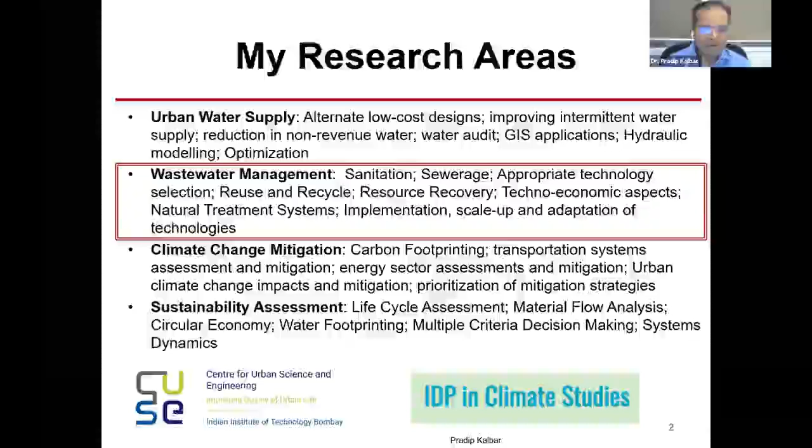Today I'm going to focus more on the wastewater story, which is the theme of this webinar. Specifically, the urban water cycle in India - we have to reach a circular urban water cycle. But currently we abstract water, treat it, distribute it, consume it, generate wastewater, try to treat it, and then dispose of it. There is no circularity - we are mostly in linear use of it.

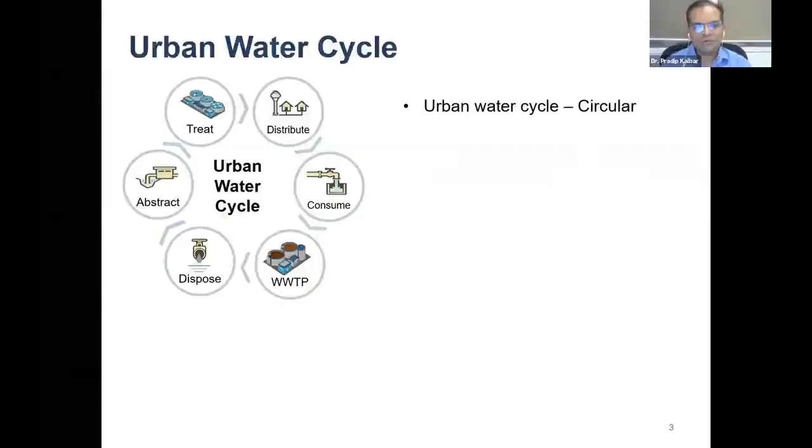So this is our water cycle, but a lot of urbanization impacts are happening - population, as Professor Tansel highlighted, industrial uses are increasing, lifestyles are changing. So many issues are there, and changing from linear to circular is a big challenge. We will see what the challenges and opportunities are.

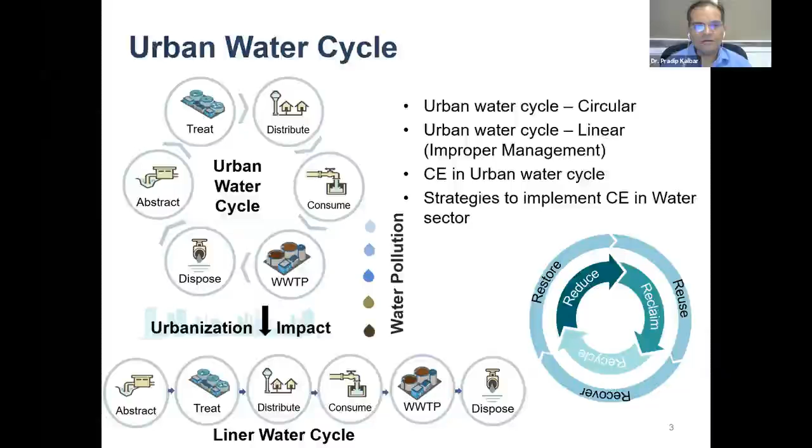So we want to achieve these particular 6 R's. The entire presentation will be attached to this reduce, reclaim, recycle, restore, recover - these principles of recycling. And there can be more R's also - people have listed many types of R.

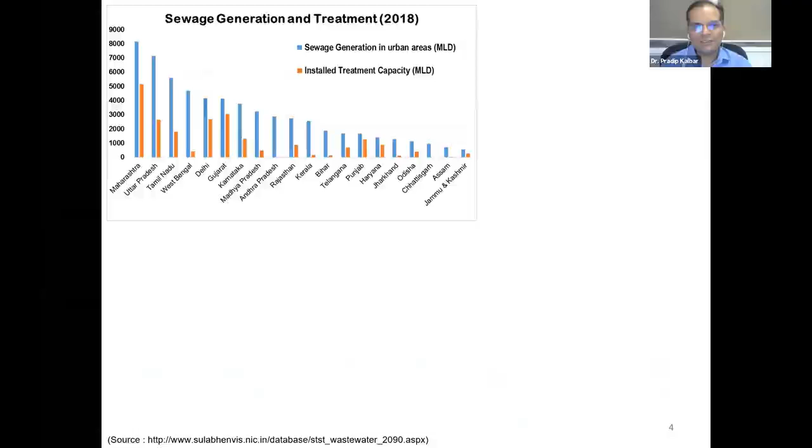Particularly in India, looking at the sewage treatment and generation scenario, every state is falling short - there is a gap between how much sewage is generated and the installed capacity. Every city is behind in installing more treatment capacity. Overall in India, about 37% sewage treatment capacity exists, and the rest is the gap.

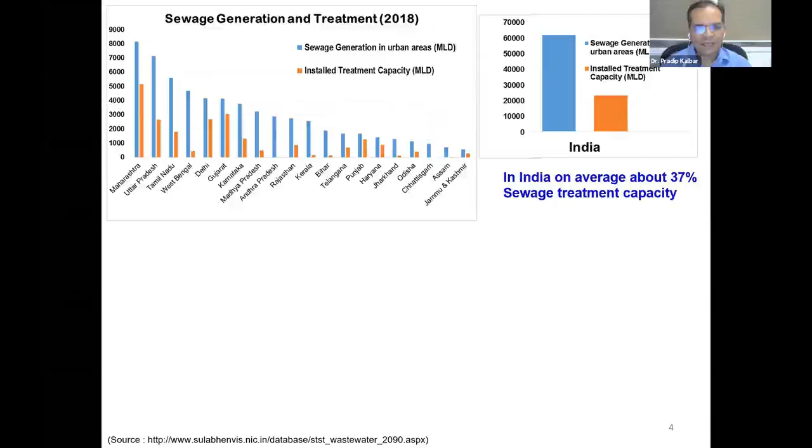But we have to understand that generated wastewater itself is a more important resource, and that particular change of mindset is needed.

Recently this data was released again from the Central Pollution Control Board. If you see, although we say we are in a gap of the treatment system, the capacity that is installed is not fully utilized. In many locations I have found that the treatment plant is there, but the collection system is not complete or not there at all. So we are in this situation where a treatment plant of big capacity for the next 30 years is installed.

But I think as a consultant or as an engineer, we understand there can be modular construction, there can be phase-wise construction, but urban local bodies want to go for a single tender for a 30-year contract. So there are many issues, and the entire investment in huge infrastructure is going to waste. Capacity utilization has to be focused on, even with simple analysis. So a couple of students are going to work on further detailing this particular capacity utilization - but I see this as a big gap.

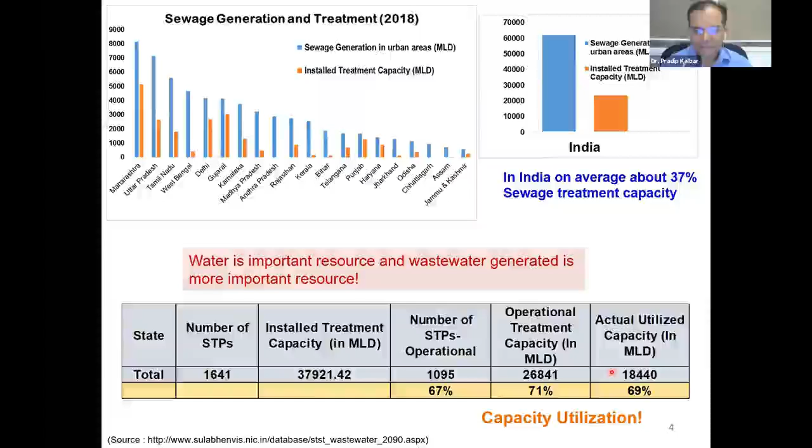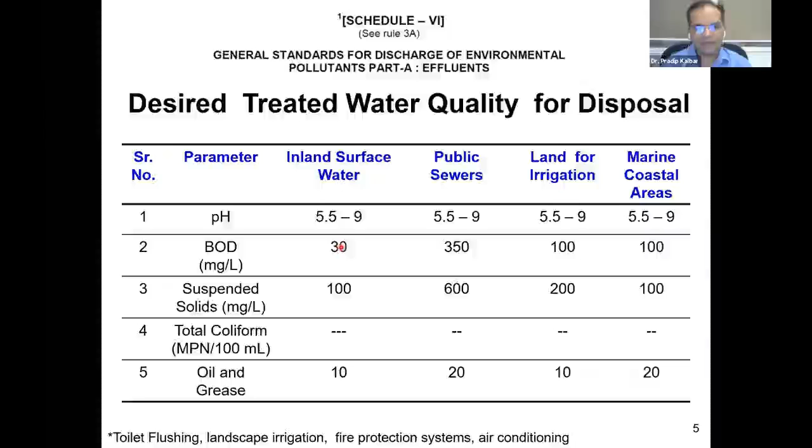Coming to quality standards - historically we have used this general discharge standard, where our typical BOD mindset is 30, and there has been a lot of pressure to change and modify more stringent norms. So recently there was a change - I'll come to that.

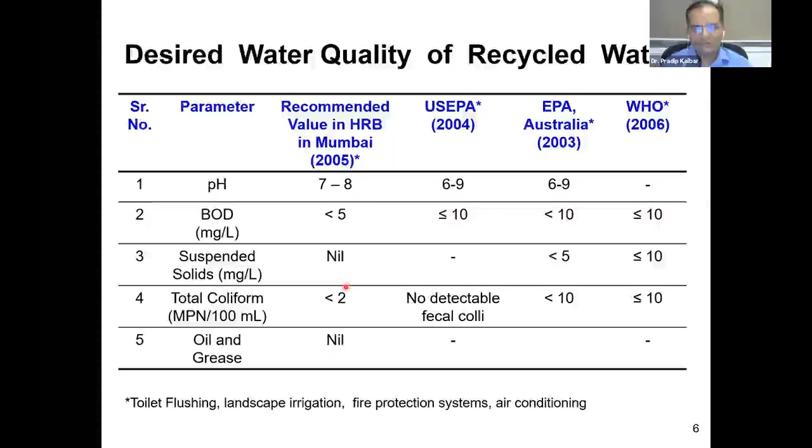So it is not a question of whether we have a standard or whether we need more debate on this. We have a standard, and that has recently been given a clear order from National Green Tribunal that if your typical inlet is sewage, the committee recommended these standards basically for mega and metropolitan cities: 10 milligram per liter BOD standard, class 1, with some flexibility. But NGT has clearly said that all water resources are equal, and we have to aim for this particular discharge standard.

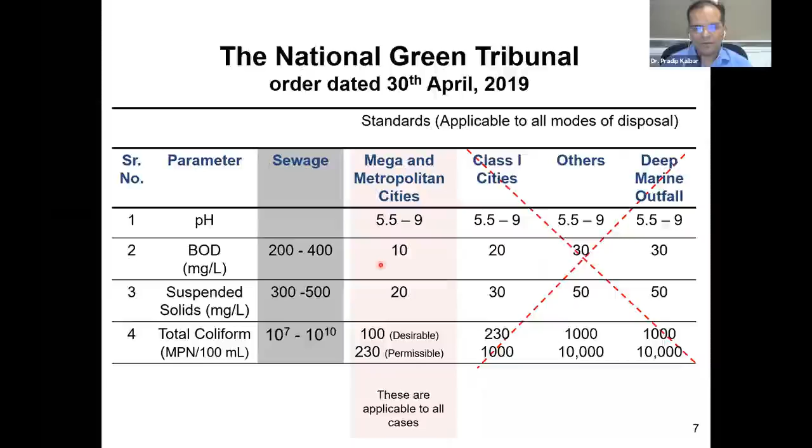Now this poses a big burden on the infrastructure, because how will cities generate the money to cope up with this new discharge standard, when they are already struggling to match a 30 milligram per liter sewage treatment infrastructure. Now suddenly 10 milligram per liter is a big challenge, but it can be converted into an opportunity, and that's what I'm going to discuss.

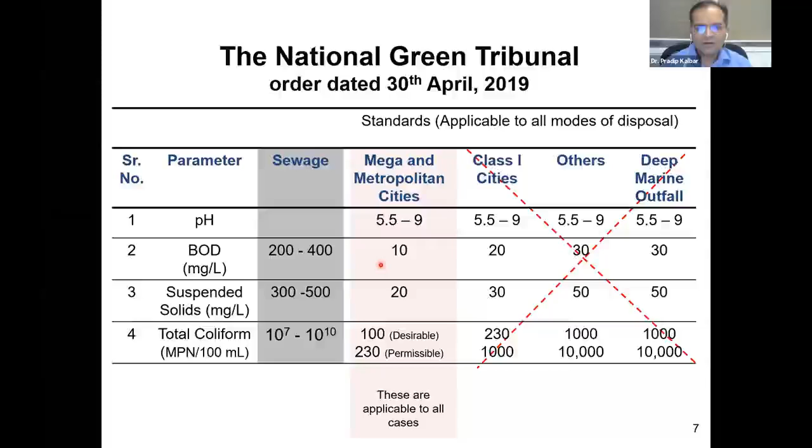These are the broad approaches of wastewater management, and Professor Tansel has already given you the overview. But on the management side, we first have to work on prevention and conservation also. That gets neglected always, and we directly jump to the treatment side. But this is a big box, with big opportunities there.

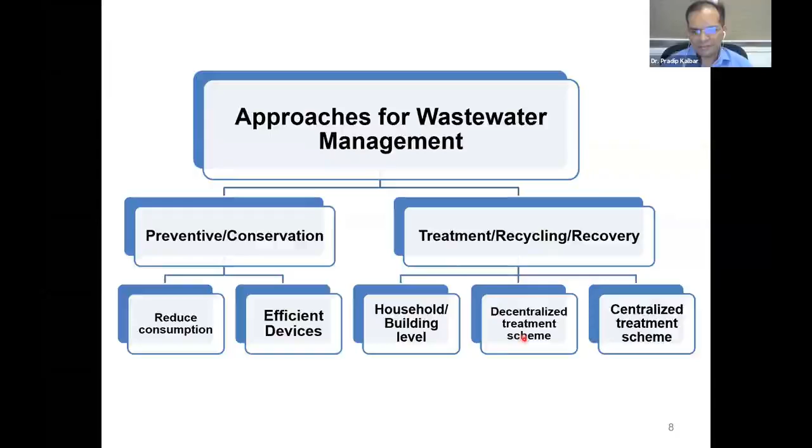We have to move from treatment to recycling to recovery, and it's a big change in the infrastructure mindset and infrastructure planners that has to be brought in. It's not only the treatment, but we have to lead to recovery. Then there is building level treatment, decentralized, and centralized. So this spectrum also we have to keep in mind.

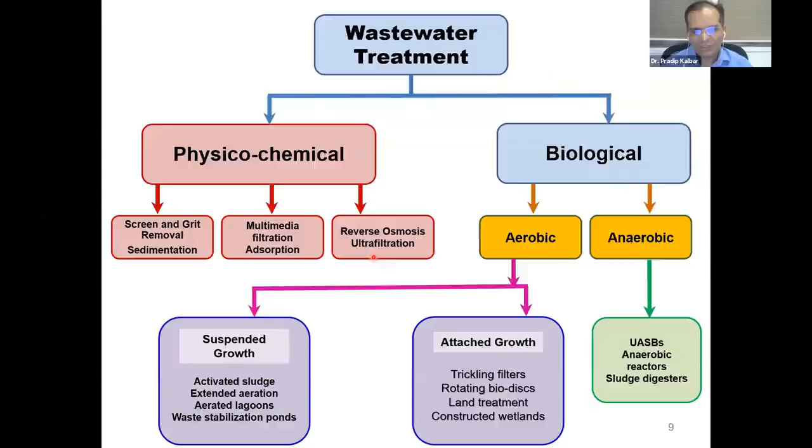And there are different technologies, from physicochemical to biological, aerobic to anaerobic, suspended growth and attached growth. I think people in the water industry know this particular diagram. So we have the technology, we have the need. So what's wrong? Why are we not able to achieve this? That is the bigger question. So what is wrong with the current approach?

If you see, this is, let's say, the physical boundary of the city. What we are doing is we have agriculture land using artificial fertilizers to produce our food. That food gets consumed in the households. We use detergents and chemicals in the households. We fetch fresh water from a large dam, stored hundreds of kilometers away, for example in Mumbai city. And then we generate wastewater, which again has NPK and organic matter as pollutants. Then we have a centralized treatment system, which discharges this sludge and the effluent.

And these all carry these particular nutrients and energy. So the issue is that on one side, we are fixing nitrogen at a huge amount of energy in the fertilizer industry, and we are again putting energy back to release this nitrogen back to the atmosphere. So you can see, on one side, you have a huge investment of energy for fixation and then release. So this needs to be fixed.

We have to stop this particular use of artificial fertilizers and create fertilizers from this sludge. That is a huge technological change, and a lot of policy changes need to be done. We have to stop consuming fresh water as much as possible, and create secondary uses of the water that we are already fetching. So virgin water consumption has to be reduced, and we have to stop consuming the energy.

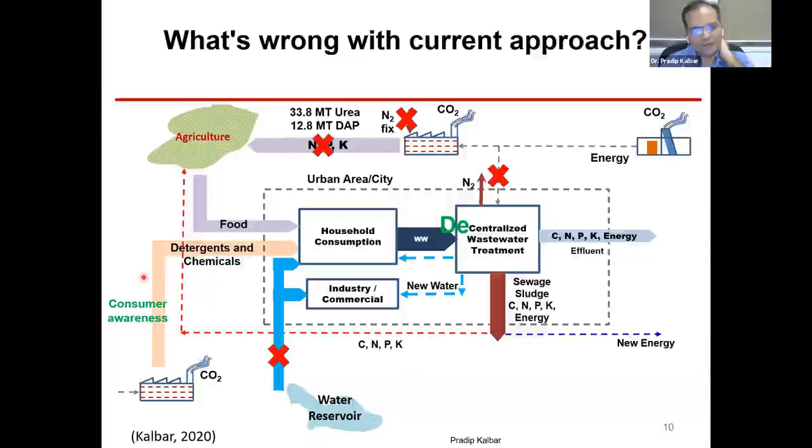And when I say decentralization, many people get upset. People say, oh, why decentralization? Do you know what is the problem? I know, I worked in industry. I know what the problems and issues with the technologies are. So the issues here are - we will discuss decentralized and centralized later - but consumer awareness is another big challenge.

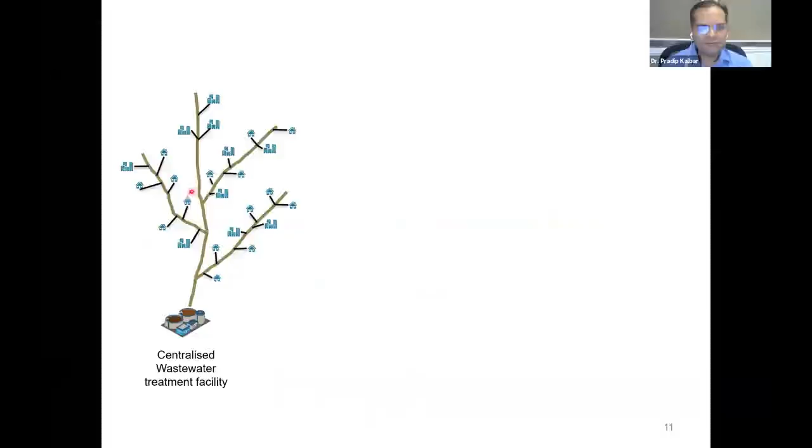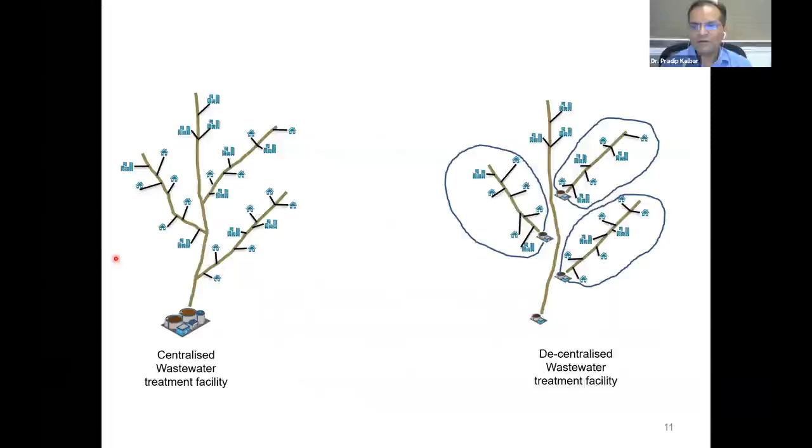So basically, centralized system, as we all know, is a tail-end system where everything is taken out of the city boundary, or towards the end of the city, and then treated. In decentralized, we try to do some scalable, small scale systems where decentralized treatment can be used.

Now, the issue is this decentralization is of the scale. Too small systems are difficult to operate and govern, and do not offer scale of economy. So we should not jump on decentralization just blindly. We also need to look at what is the scale of economy, how small systems are feasible.

Highly centralized systems place a challenge in recycling of treated effluent and sludge, because if you put everything at one place and try to recycle, again secondary distribution network cost will come, sludge transportation cost will come, and there is no scale of economy beyond one point. So all engineers will understand that the scale of economy is somewhere in between.

This additionally requires deeper sewage network for flat terrains and is difficult to maintain. I've seen in many cities the situation of sewerage networks. Enthusiastically, people go for a sewerage network underground, and then maintenance is with the urban local body. It is very difficult for them to manage. So we have a spectrum from highly centralized to highly decentralized.

Currently urban local bodies, and I would say consultants, are also very comfortable with this particular idea of highly centralized infrastructure. They are basically trained to think in that manner only. And I request all of you to take note, because it is easy to prepare a DPR in one shot for a centralized system, propose everything in one go, and just go for a big budget project. Everyone likes that - politicians, consultants, EPC contractors, everyone likes that. And that I see as a very big problem we have, and a lot of changes are needed.

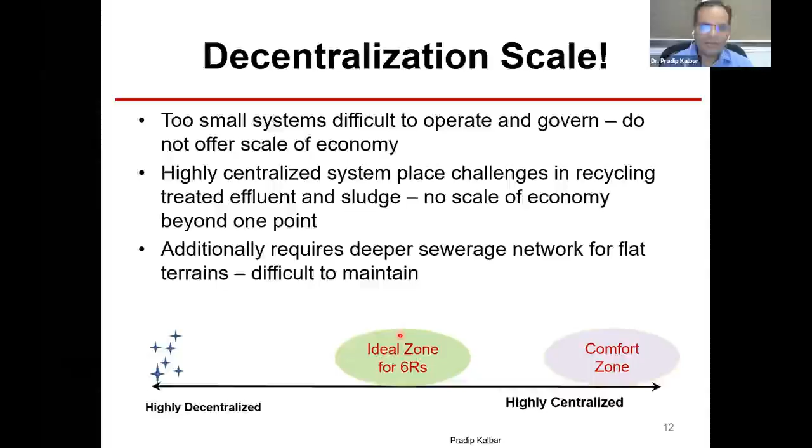The ideal zone for implementation is in between, where for every city this scale will be different. So we have to identify for that given city how we can segregate the centralized system and have a decentralized system, so that the 6R - recycle, reuse, reduce - all those will be implemented. If we have that kind of flexible infrastructure, it will create much more opportunities than a centralized infrastructure. That's the whole point I'm trying to make.

So the challenges in wastewater recycling: scale of implementation is not known. People just go for centralized because there is no knowledge. So we are working on that to create that knowledge.

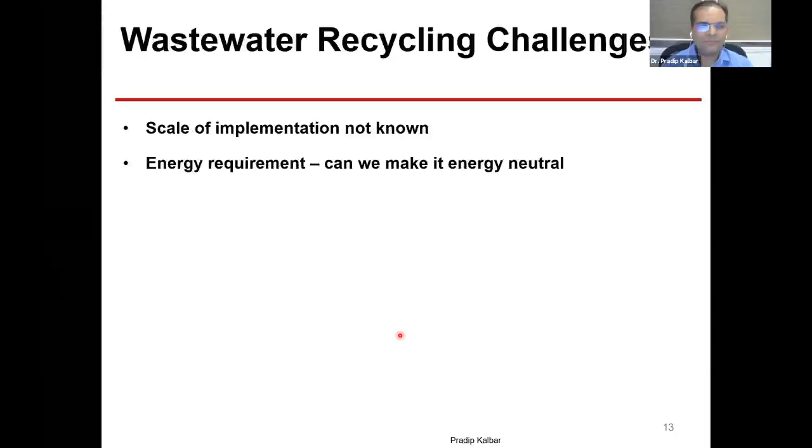Energy requirement - can we make it energy neutral? Because there is no revenue with the urban local body to operate these plants. So much of a dark situation - people put off the aerators because they cannot pay energy charges. So this entire infrastructure will go to waste.

There are resources to be extracted - nitrogen, phosphorus - lot of technology scale up is needed.

Pathogens and pathogen removal - if you want to recycle water for higher ends, there's a question of reliability, because we have to develop a system which is reliable. If there are risks posed by the treated wastewater - whenever somebody asks me why I say costs are higher, it's because I'm imagining a very reliable system. If you say you'll provide recycled water to industry, you have to provide it. You cannot say tomorrow, 'okay, today my plant is not running,' or 'today this particular parameter is not working.' So that reliability cost also needs to be incorporated in the system. That's why the cost of recycling water has to be properly counted.

Emerging contaminants - we are already not able to match the carbon, BOD, nitrogen, phosphorus limits, and there's already so much use of household chemicals. That's why I said consumer awareness matters. So many chemicals are used unnecessarily in households and get discharged, and that is posing another challenge to the recycling of water. Revenue models - who will fund this capital infrastructure and operation maintenance? That is a big question.

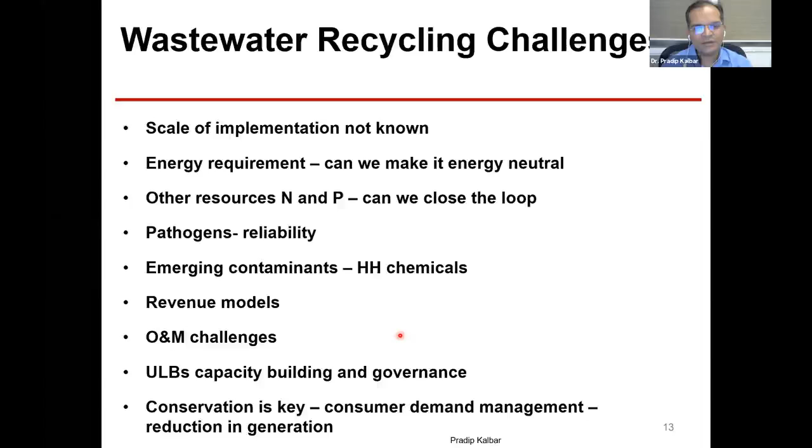Operation and maintenance, capacity with the urban local body, skilled manpower, governance, and conservation all need to be thought of together to really imagine this particular system. I have documented this entire story in a paper. You can read it here, or write to me and I will send a copy.

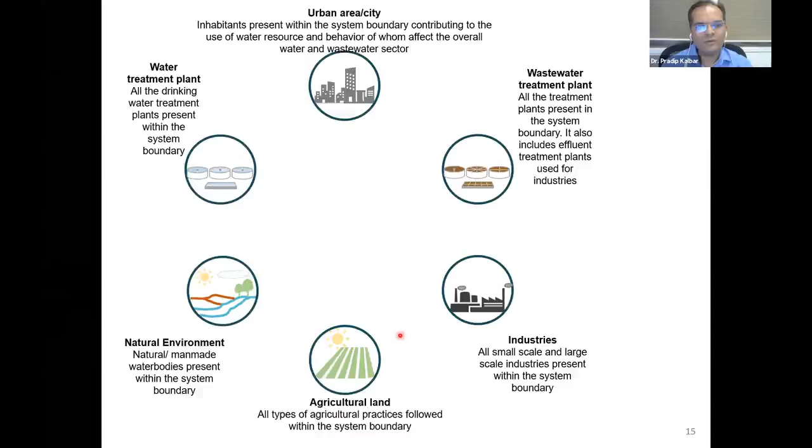We have this urban water cycle where a water treatment plant, urban area, and wastewater treatment plant exist. Currently we are doing it in a linear way, disposing of the water and the nutrient. We have to implement these 6 R's to change this picture, instead of one city passing the problem on to another city. Fixing this is the entire effort we need to make.

First we have defined what recycle and reuse mean, since those definitions need to be clear. Reduce means at every phase we have to reduce water wastage and consumption. Reuse is cascading of resources, meaning how much water we can use without treatment. Recycle is when a city uses its own water for secondary purposes after treatment.

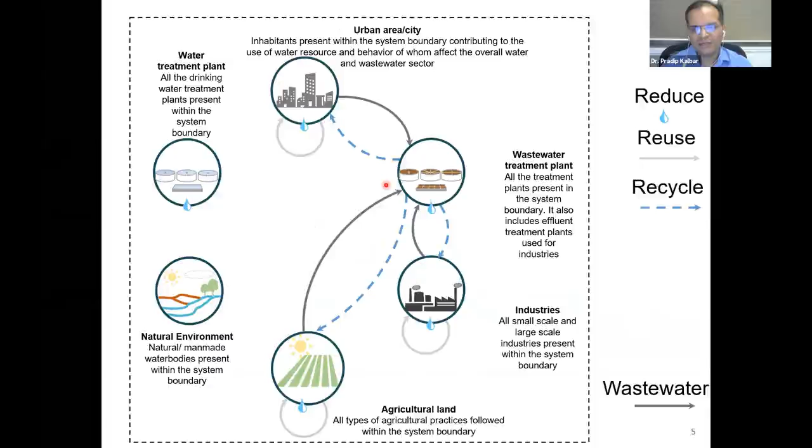Reclaim is when a city sells water to industry, or industry buys water from the city or other stakeholders. Restore is when there are no enough buyers - in many projects I've seen good treated water available but no buyers due to a policy gap, so you can recharge the groundwater instead. Recover means energy recovery and nutrient recovery, which is the next phase of technologies we need to adopt.

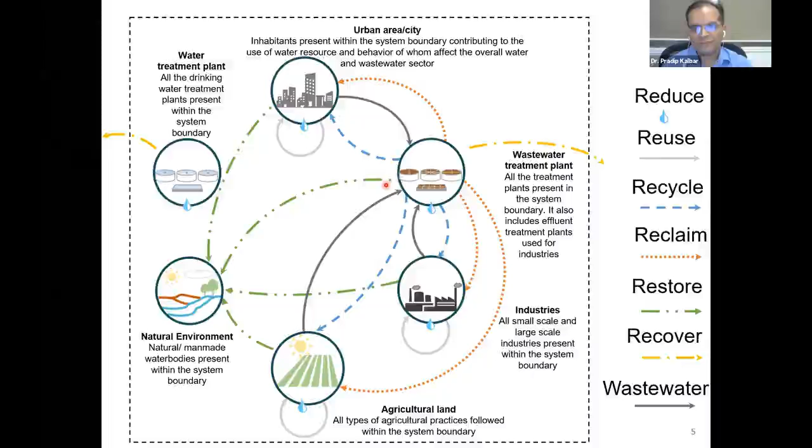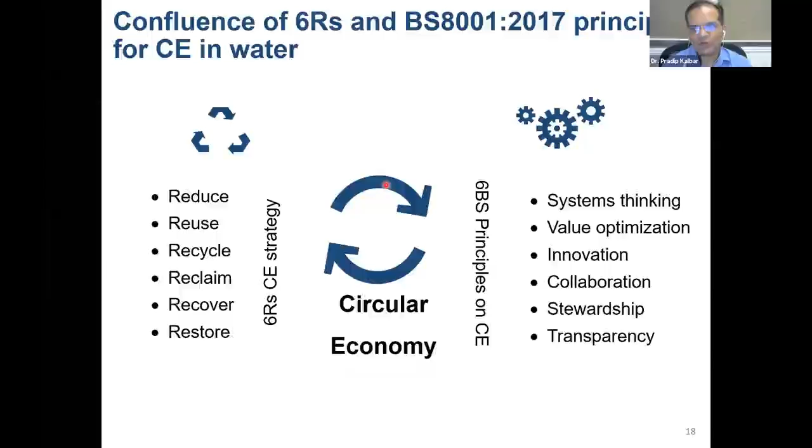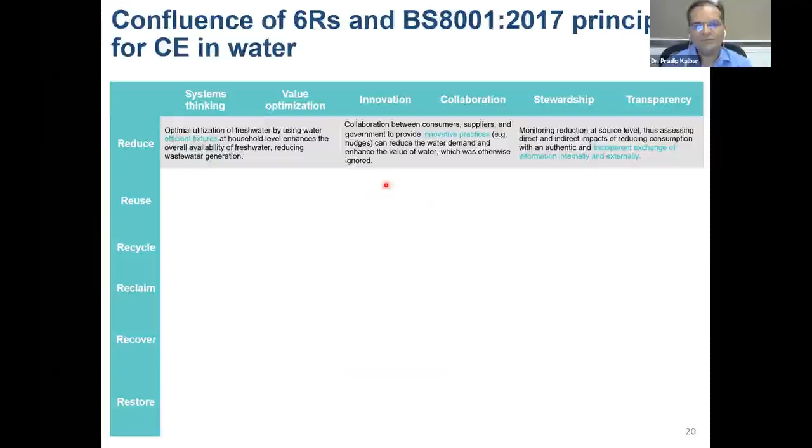Circular economy provides a nice framework for bureaucrats and managers, because here you apply system thinking, value optimization, innovation, collaboration, stewardship, and transparency. We have identified how urban local bodies can work with industry and mapped each of their R's with these principles of circular economy.

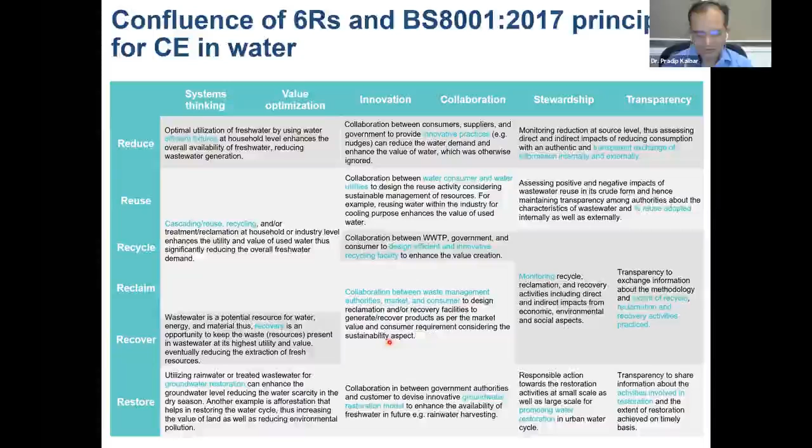You can go through this detail, it's very thoughtful. My PhD students and I have worked on and given this tabular formulation, showing how we can apply system thinking, value optimization, innovation, collaboration, stewardship, and transparency. That is the framework we have proposed.

The entire point I'm trying to make is that cities first need to create a market for recycled water, because if there is no market, there is no point putting in so much infrastructure. There will only be regulation, but if by meeting a regulation you can also sell the water, the sustenance of the system will improve. For example, let us discuss Mumbai's case.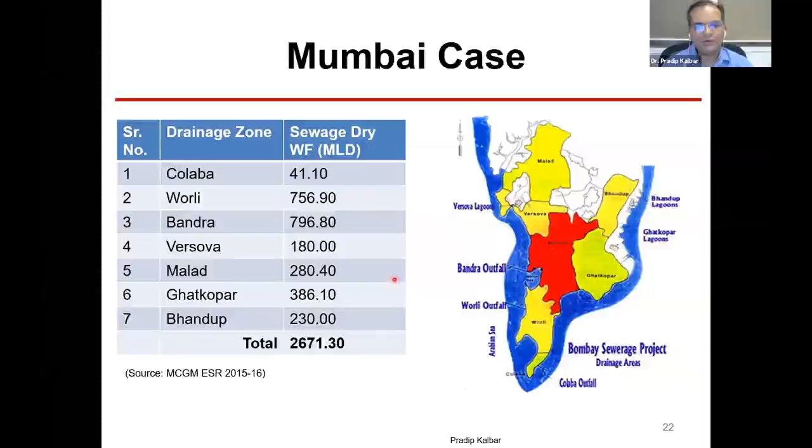Mumbai, as you know, is a coastal, island city, with locations 1 through 6 - there are 7 locations which are the draining points of the city, and this sewage flow is given here. The city's current plan is to go for sewage treatment and recycling because of an NGT order. To achieve high effluent water quality standards, the MCGM plans to spend around 20,000 crores on its 7 sewage treatment plants.

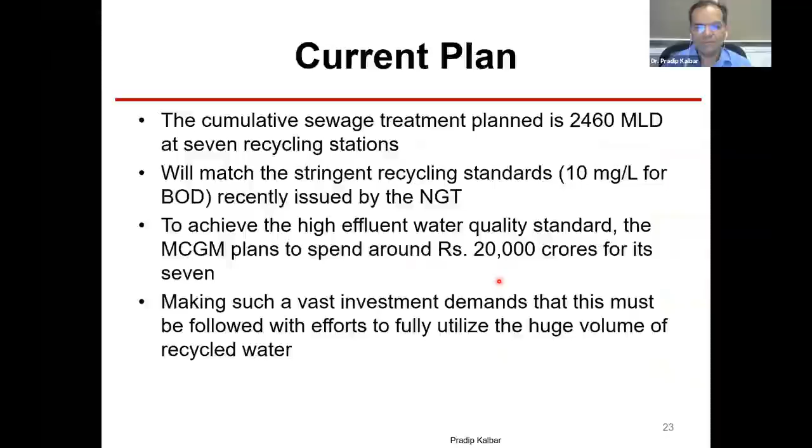If you make such an investment, it also demands efforts to utilize the huge volume of recycled water. So you can imagine, spending 20,000 crores just for treatment is not complete utilization. Why is recycling not possible in the current context? Because it is not known who will consume the treated sewage unless there is a market for it.

The cost of recycled water is around 10 to 12, not accounting for distribution cost - that's just the treatment cost I'm talking about. Whereas the freshwater tariff is about 3 to 6 per meter cube. So there is significant variation at a regional level.

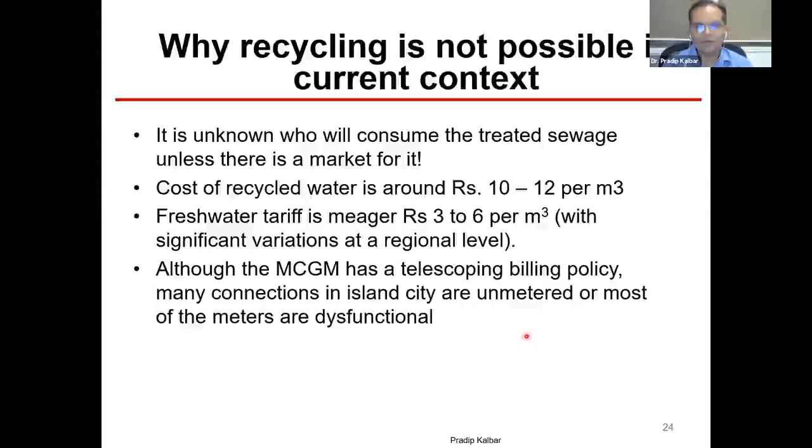Although the MCGM has a telescopic billing policy, the connections are not metered and most of the meters are dysfunctional, so the implementation of the telescopic billing policy remains on paper only. The production cost of water in Mumbai is about ₹15.

So it's the issue of price - at what price are we producing the fresh water? The revenue demand and collection from the MCGM has been the same for the entire last decade. Basically, there is no change in raising the bills.

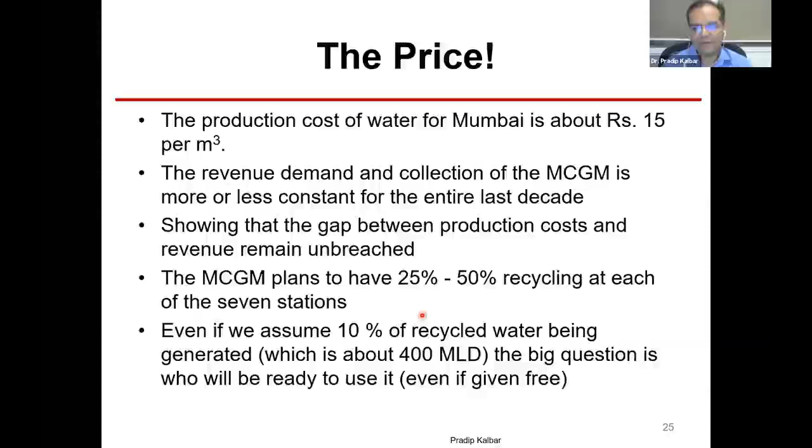That is the scenario currently. This shows that the gap between production cost and revenue remains unbreached. The MCGM, even in the DPRs, has written that the plan is to have 25 to 50% of recycling at each recycling station. Let's say even if we realistically plan for 10%, it is about 400 mld. The big question is who will be ready to use it, who will distribute it.

It's a big question. The next issue is location. The planned recycling stations are highly centralized at the fag end of the system in the near coastal areas. It will need a large secondary distribution network in mostly concretized roads already crammed with dozens of other utilities.

So instead, decentralized recycling stations of about 50 mld. This 50 mld is my number, you can debate about it, but for a city like Mumbai, 50 mld can also be called decentralized, and maybe more feasible in Mumbai's case, as this will create an opportunity for establishing a localized recycling network. This number has to be decided for each city. For 100 mld kind of sewage flow in a city like Kolhapur, the decentralized scale will be different.

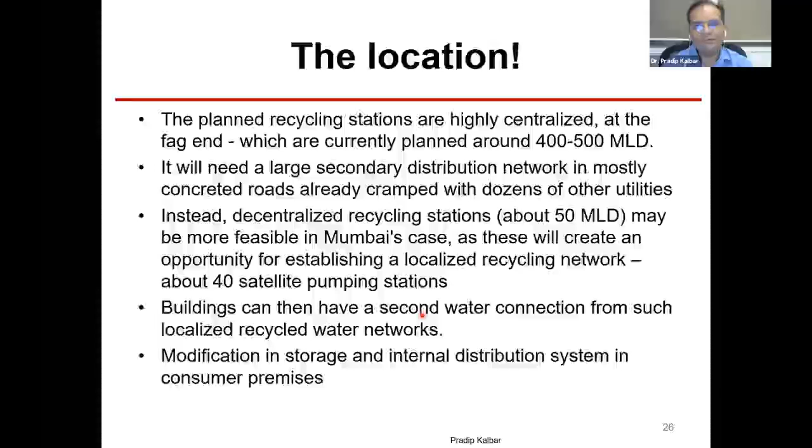So buildings can then have a second water connection from such localized recycling water, and modification in storage and internal distribution. There are a lot of changes needed in consumer infrastructure. The guidelines and bylaws, because the existing bylaws do not anticipate other water resources for non-potable use, need drastic change. So it's not the technology, it's not the physical infrastructure.

Bylaws need to change to enable mandatory dual plumbing systems for future buildings. I know it is difficult for existing buildings, but if we do not act now, it will be too late. Again in 10 years I'll be making the same presentation that there is a need for dual plumbing systems. There is no point.

So resizing of all the municipal connections, because current connection sizes are huge in Mumbai, at least we know. Residential, commercial, industrial connections should be restricted to potable water supply for domestic purpose only, because they are getting the benefit of fresh water.

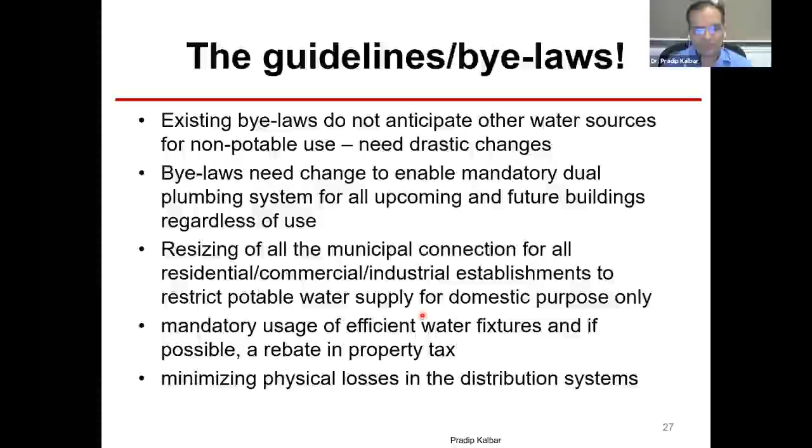If you change the connection sizes, or cut off connections, some stringent action has to be taken. And mandatory use of efficient water fixtures, and if possible an associated rebate, and minimum physical losses in the distribution system. That is another story, how we can improve water supply.

There is a need to provide comprehensive procedures and guidelines, responsibility of each stakeholder - who will sell, who will buy, at what cost, the level of treatment required, its use after treatment, expenditure - all this needs to be defined before we jump for very fancy high-end recycling stations.

In summary, there is no immediate need for toilet to tap. Many people go abroad, see that, and think okay, everything is connected, that is fine. In Western countries, we have the reliability, the guidelines, and everything is there. So enough other avenues are available in India for other secondary purposes.

We have to first create a practice of recycling water. Recycling at the point of use or sale, that is the key. If you recycle at some moon on Mars, who will distribute that water? So that is another challenge.

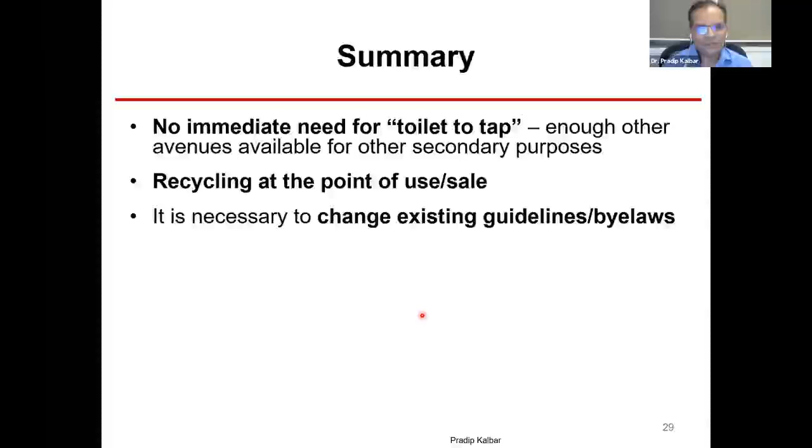So it is necessary to change existing guidelines and bylaws. Scale of implementation of the solution is more important than the solution itself. Many people spend time on technology discussions, but what is the scale you are implementing? That is more important.

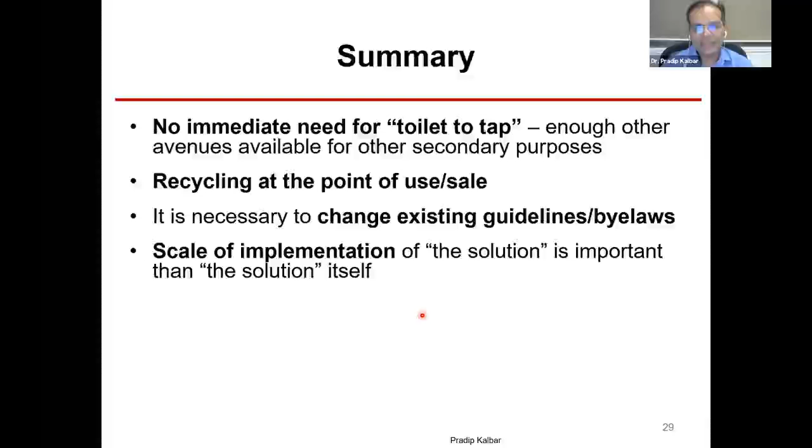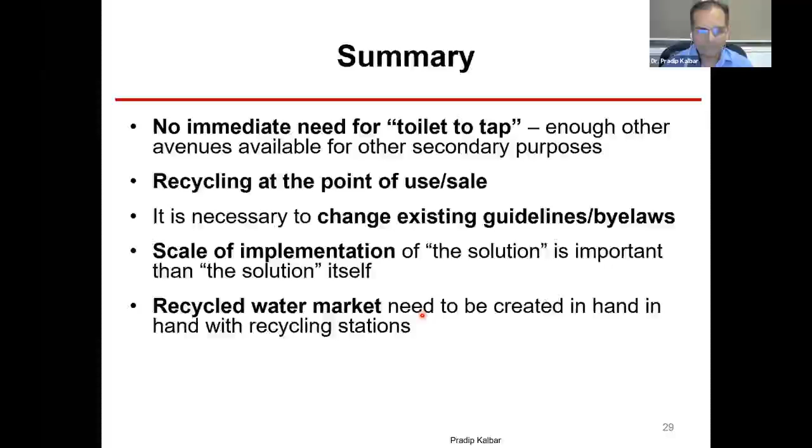A recycled water market needs to be created hand in hand with recycling stations, because unless you have a market, there is no financial sustainability for these recycling stations. Decentralization and closing the water, carbon, nitrogen, phosphorus and energy loops is the key to achieve sustainable wastewater management.

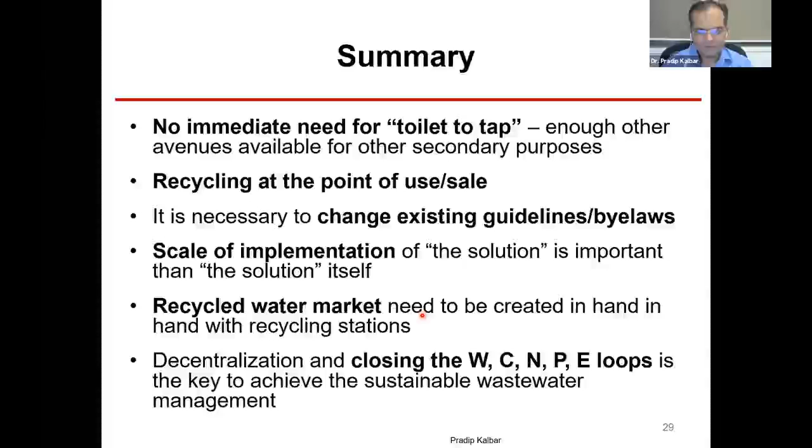So I think that's all I wanted to share from my side as far as my understanding about this topic, and I'm really happy to be here with this particular group of esteemed members. Thank you.